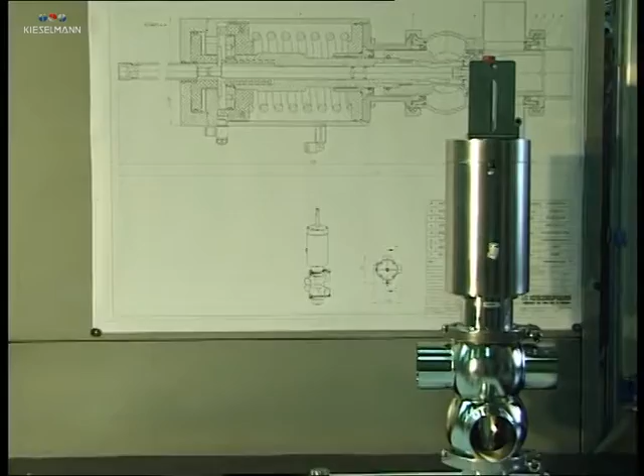The tools shown here are required for the disassembly and assembly of the valve. You will find the item numbers of the assembly tool kit in the operating instructions of the KIESELMANN double-seat valve.

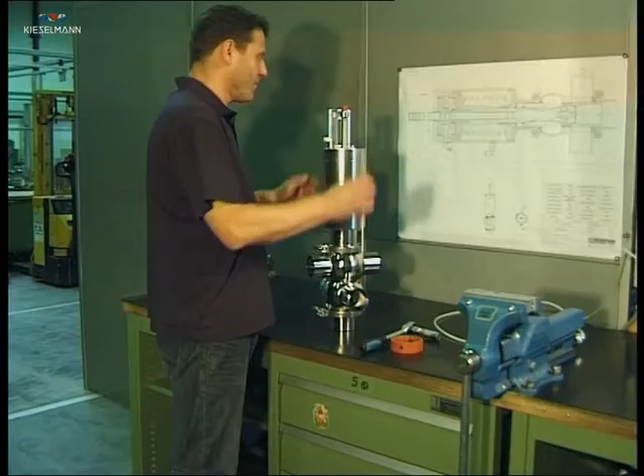Disassembly. Remove the control air, steam, and/or cleaning pipes and electrical cables, sensor brackets, or control heads from the plant before the valve is dismounted.

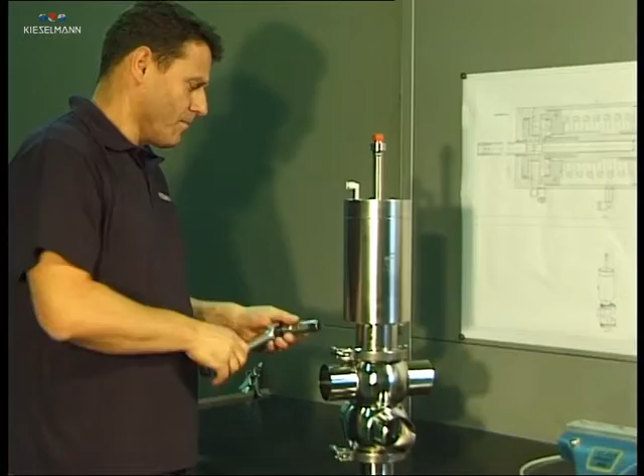Unscrew the upper locking clamp. When you apply air, the actuator will be automatically lifted out of the body. A distance is inserted between lantern and shaft seal. Our mechanic uses an appropriate seal. Let the air off again.

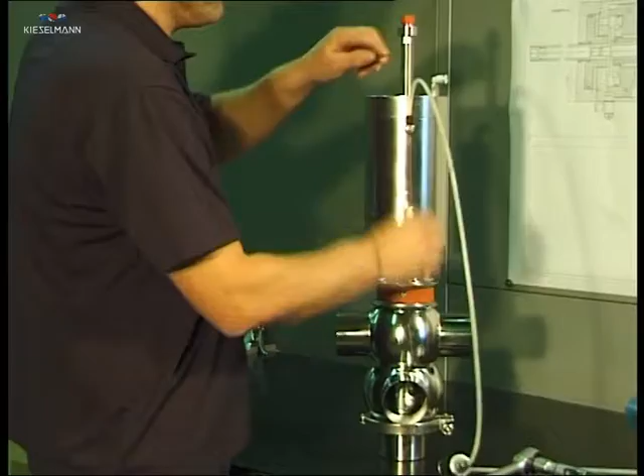The valve plate is lifted out of the valve seat. Pull the valve insert carefully upwards out of the body without tilting it. After having unscrewed the lower locking clamp, the lower shaft seal can be removed.

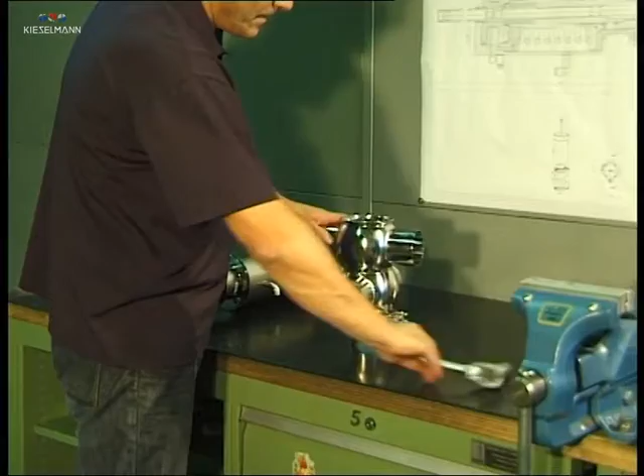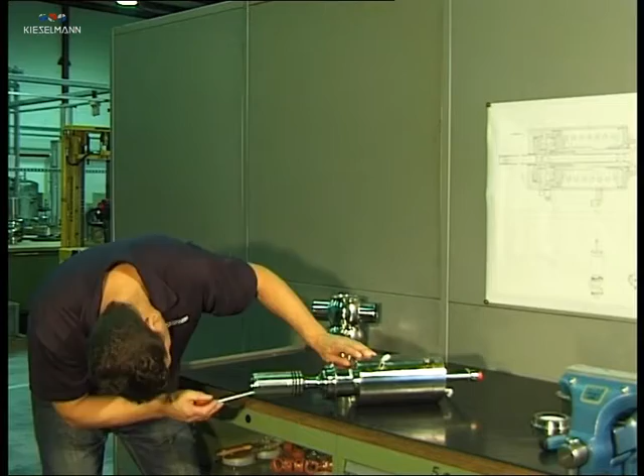To remove the lower piston, the nut in the piston is unscrewed. To do this, hold with an open-end wrench at the top of the actuator.

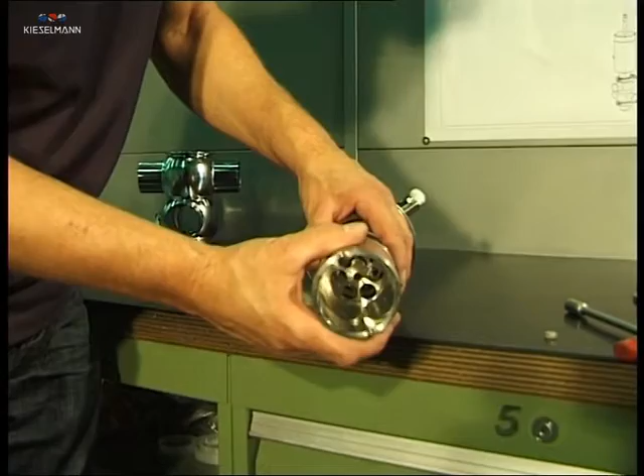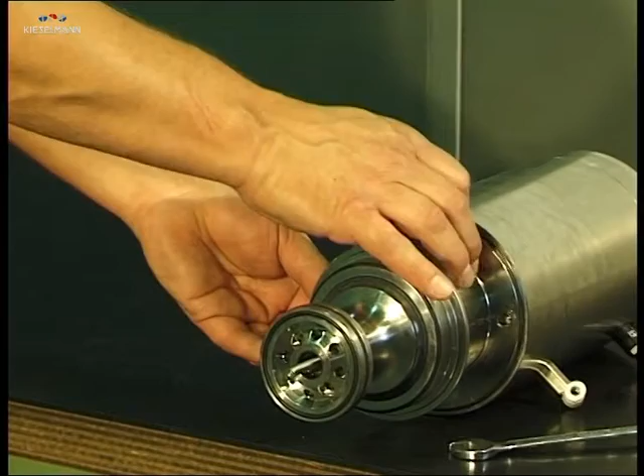Unscrew the fastening screws of the lantern. Pull the lantern from the piston until you see the bore in the spindle. Place a suitable hinged hook wrench in the bore.

Two disassembly situations may arise when the upper piston is removed. Situation 1, the piston comes off the spindle. Situation 2, the piston plate comes off the piston.

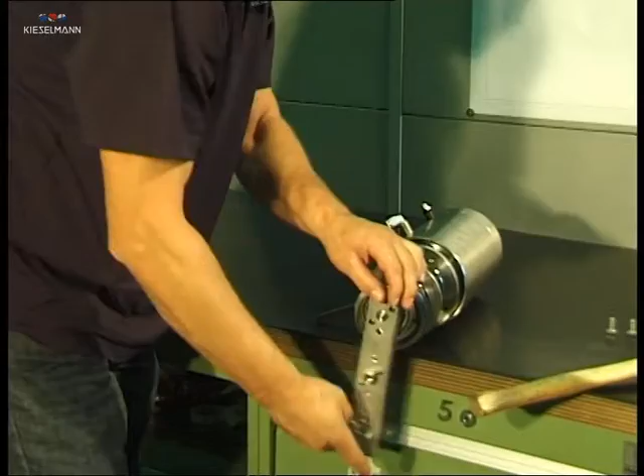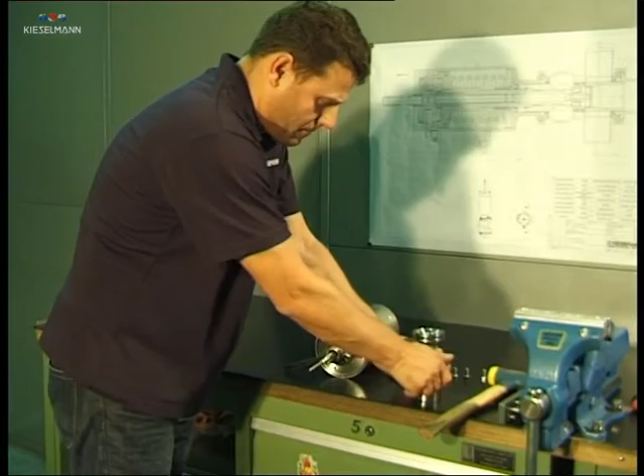Situation 1: Loosen the piston by means of the assembly plate and unscrew it. Remove the lantern and piston with the shaft seal. Push the shaft seal off against the piston plate.

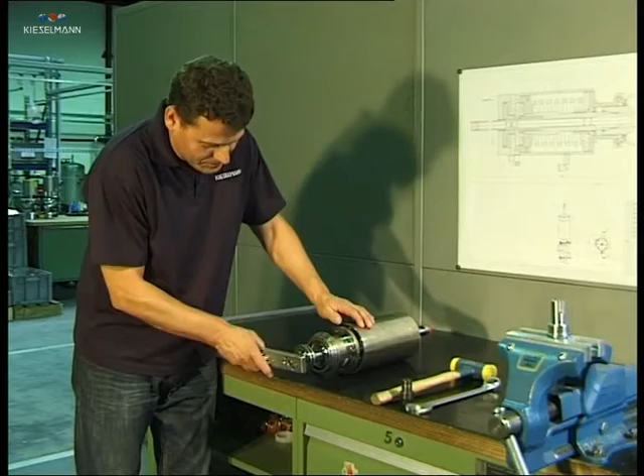Situation 2: The piston plate comes off the piston. As seen in situation 1, loosen the piston by means of the assembly plate. If only the piston plate loosens, unscrew it, remove the seal, and loosen the upper piston by means of the eccentric and unscrew it.

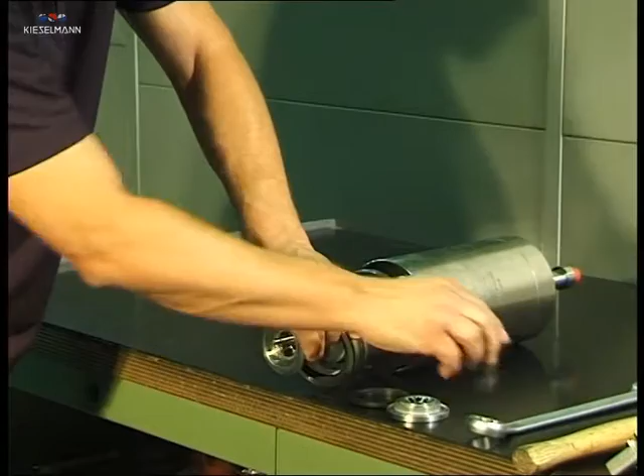Remove the circlip from the spindle. Push the lift stop from the spindle.

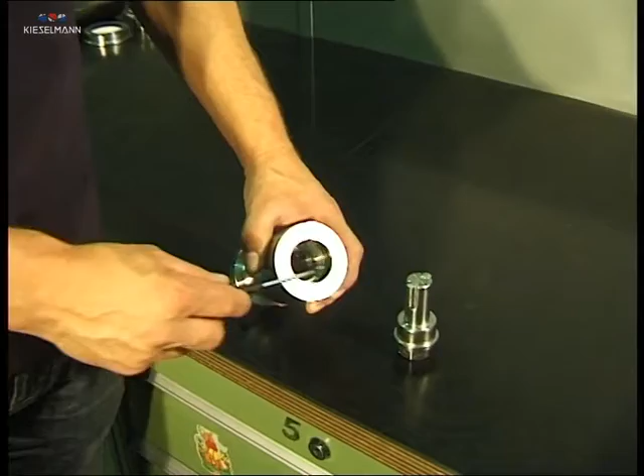If the piston loosens after situation 1, the piston plate must be dismounted. Remove the O-ring in the piston. Tighten the socket spanner of the assembly tool kit in the vise and put the piston on.

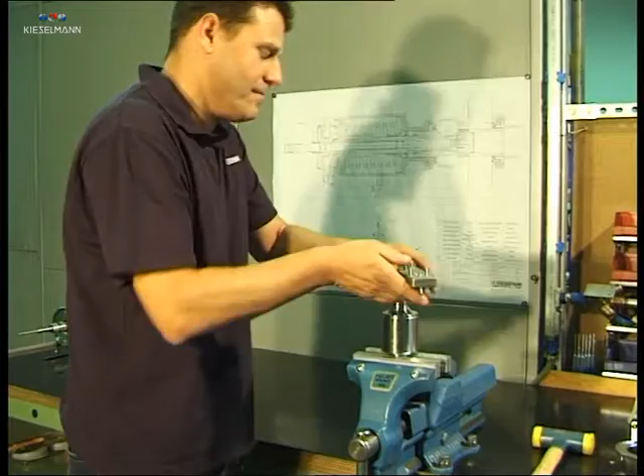Loosen the piston plate from the piston with the assembly plate and unscrew it. Remove the sealing ring. Remove the O-rings from the piston plate.

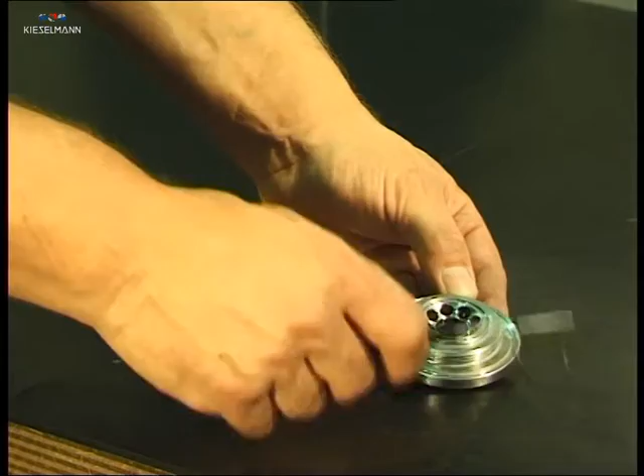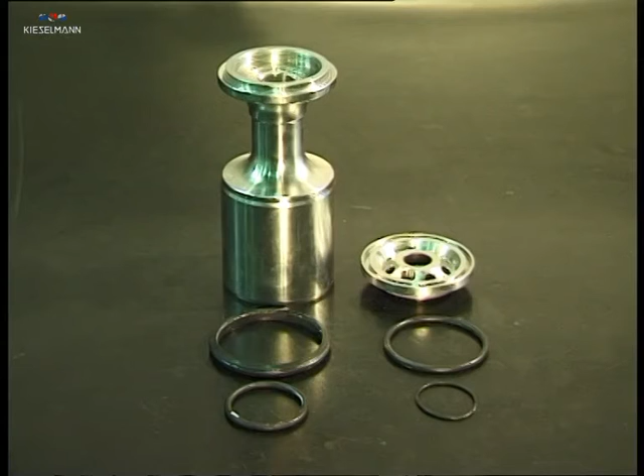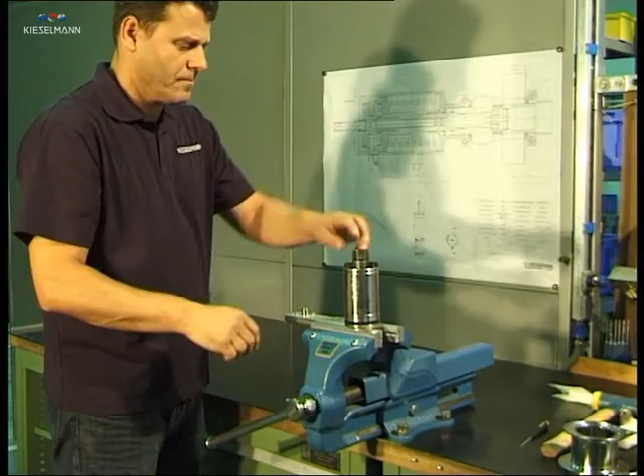To remove the lower piston plate from the lower piston, you have to tighten the assembly plate in the vise and put the piston on, as you can see here. Insert the suitable socket spanner in the slot of the lower piston and remove the piston from the piston plate with an open-end wrench. Remove the seals from the piston plate and from the piston.

Remove the sealing rings and O-rings of the lift stop and of the shaft seals. Disassembly of the double seat valve is completed.

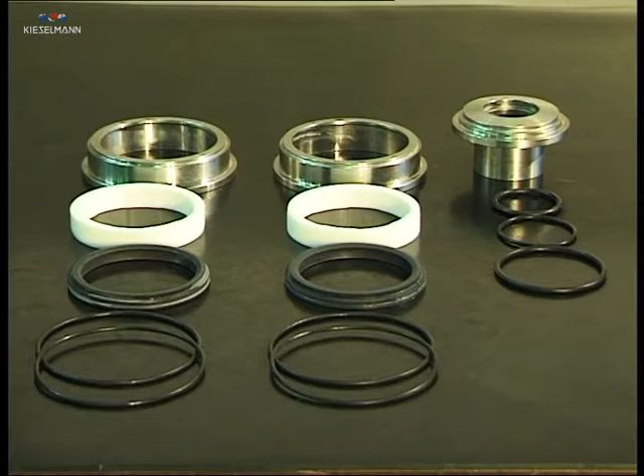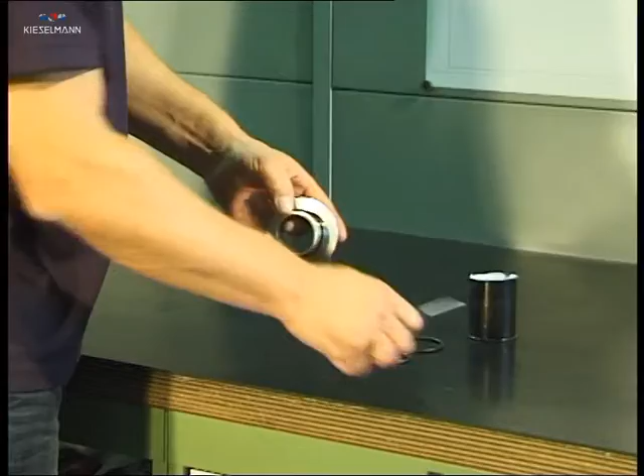Assembly. Clean and slightly lubricate the mounting spaces and running surfaces. Change all wear parts and lubricate them with a suitable grease before assembly.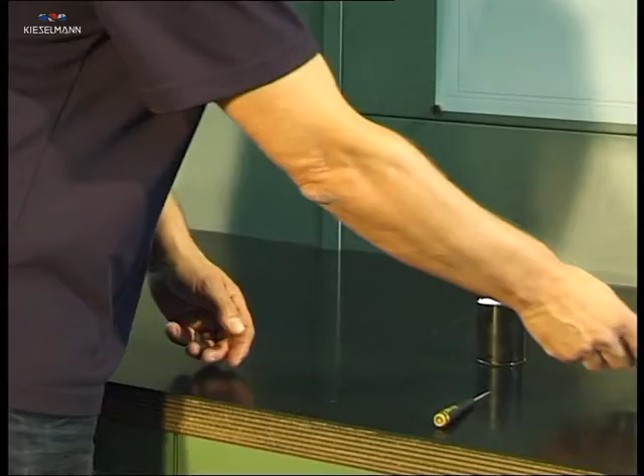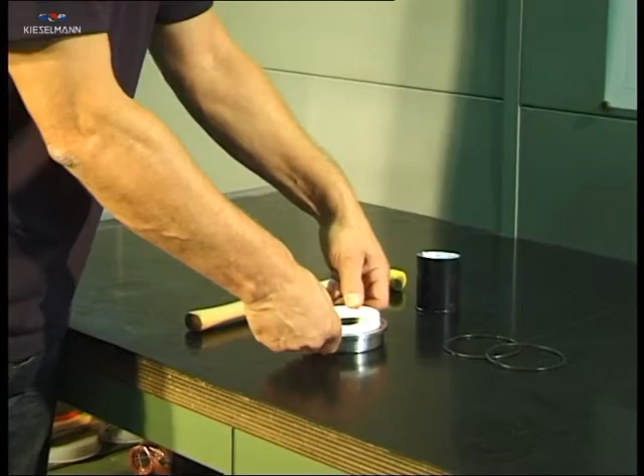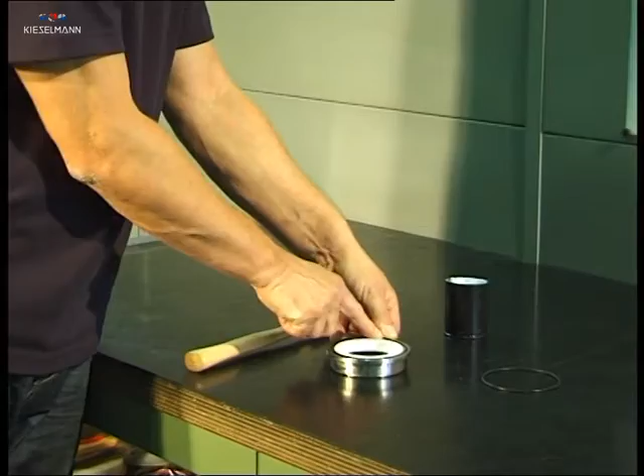Fit the O-rings into the lift stop. Put the shaft seal in the insert. Put the bearing bush with the chamfered side onto the insert, press it in and tap it gently. Insert the O-rings in the insert. Assemble the second shaft seal in the same manner.

Assembly of the lower piston assembly. Tighten the assembly plate in the vise. Fix the lower piston plate on the plate. To make sure that the sealing ring is perfectly pressed, you first screw the piston without the sealing ring into the piston plate until the metallics stop. Mark this position with a paint marker.

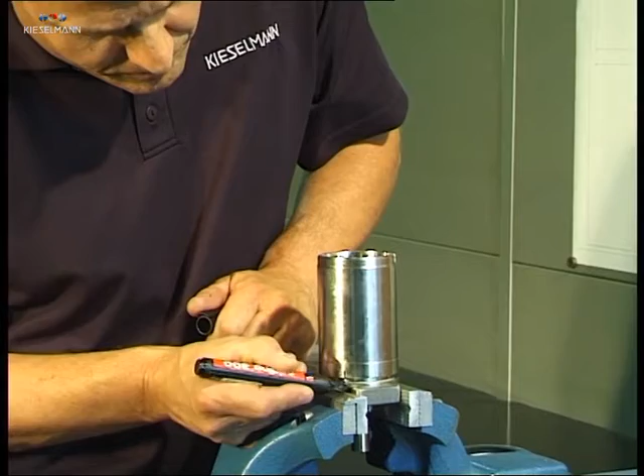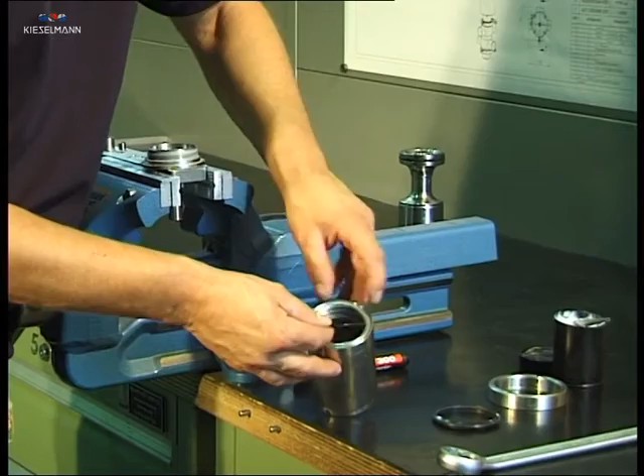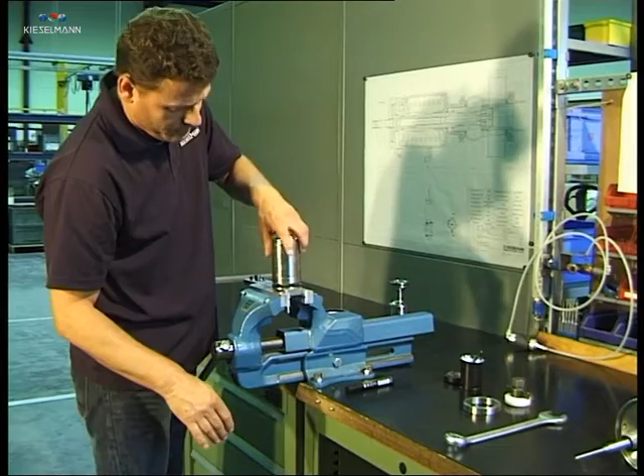Unscrew the piston, mount the O-ring in the piston, and put the sealing ring into the piston plate. Now screw the piston plate in by hand. Put the centering ring over the sealing ring to make sure that the sealing ring is concentrically pressed. Tighten the piston with a socket wrench and an open-end wrench until the color marking is reached.

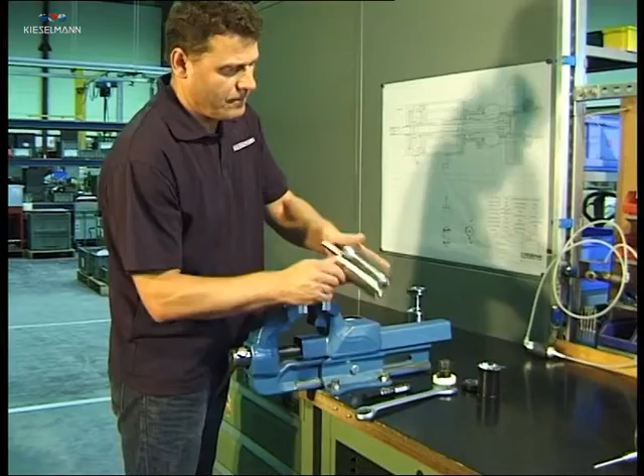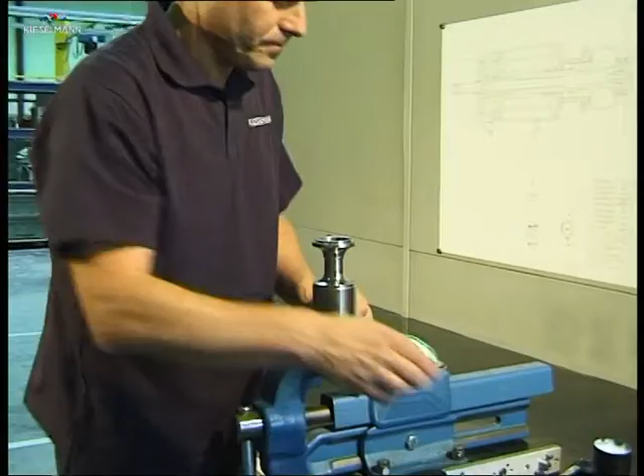Assembly of the upper piston assembly. Fix the socket wrench in the vise. Place the upper piston and screw the piston plate in until the metallics stop. Mark the position with a paint marker. Unscrew the plate.

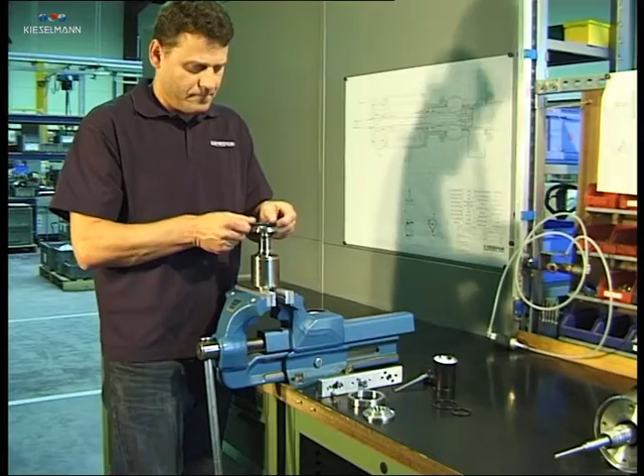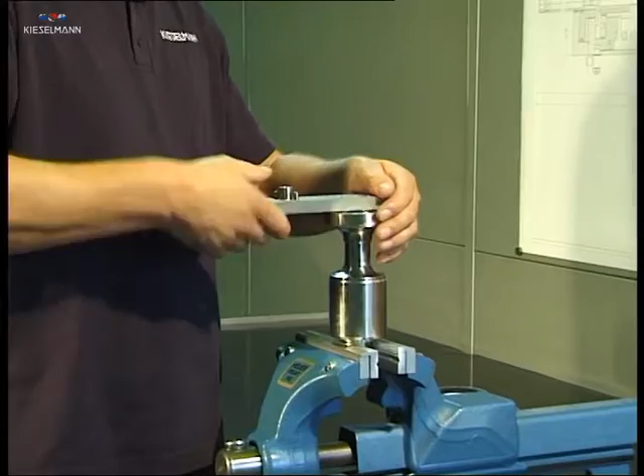Mount the O-ring and sealing ring and screw the plate in by hand. To guarantee an optimal eccentric pressing, the eccentric ring is put again over the sealing. Screw the piston plate in the piston until the color marking is reached.

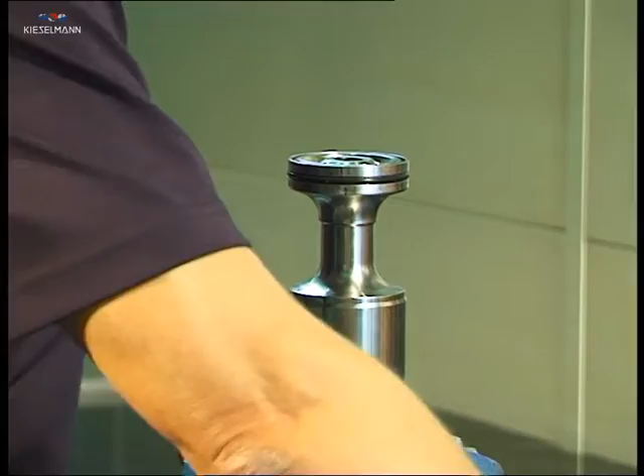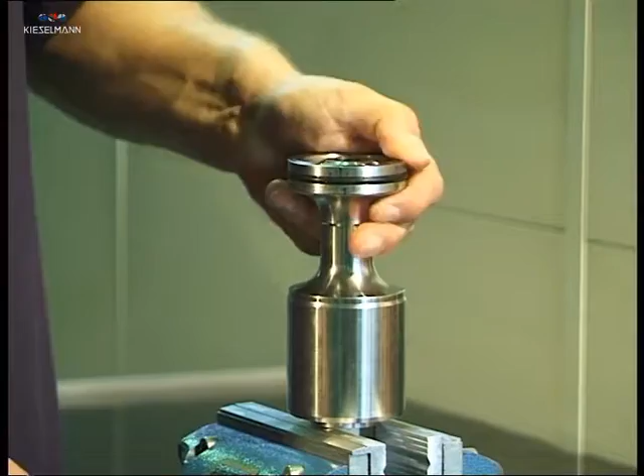Place the O-ring on the front side of the piston plate and push it in at the opposite sides respectively. Important: don't grease the O-ring and slot. After you have mounted the O-ring at the bottom of the piston, all seals were changed.

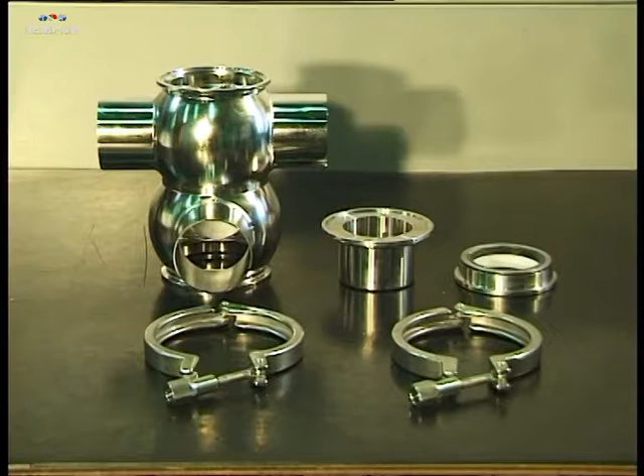Assembly of the lower shaft seal. Put the shaft seal on the bottom of the body. Place the body and mount the locking clamp.

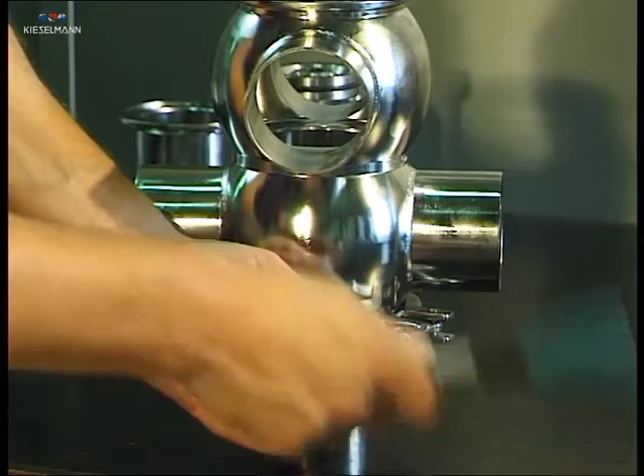Join assemblies. After having greased the threads and running surfaces, the lift stop is pushed onto the spindle and pressed to the actuator up to the stop. Mount the lantern, but do not tighten it.

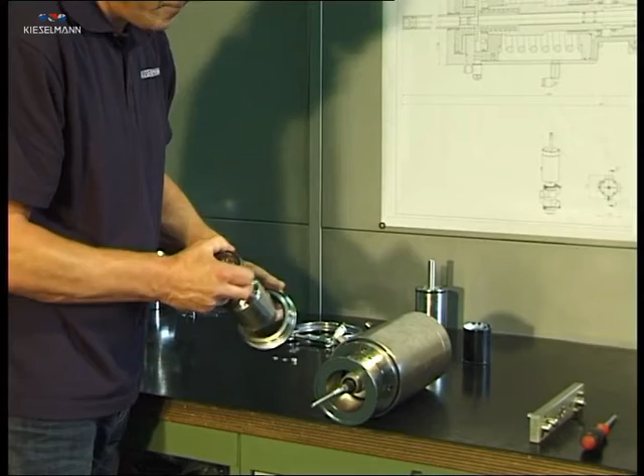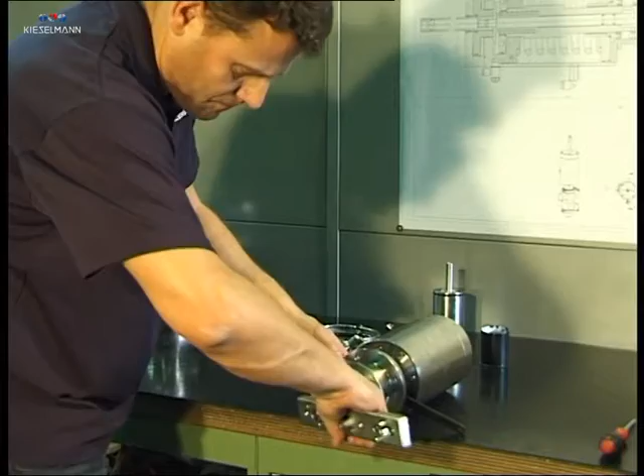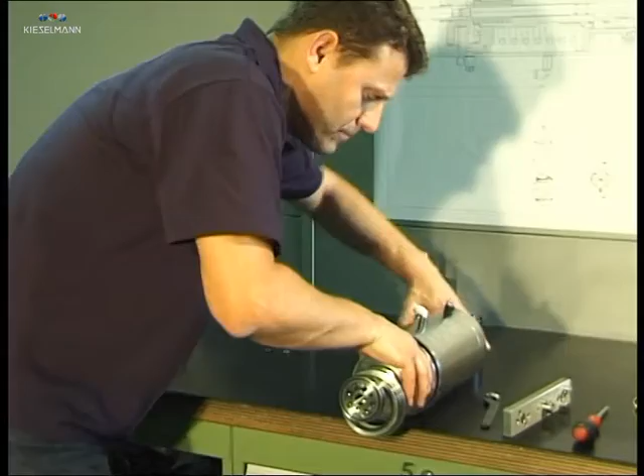Push the shaft seal onto the upper piston. Screw the upper piston onto the spindle at the actuator, and tighten with the assembly plate. Position the lantern on the actuator and screw it down.

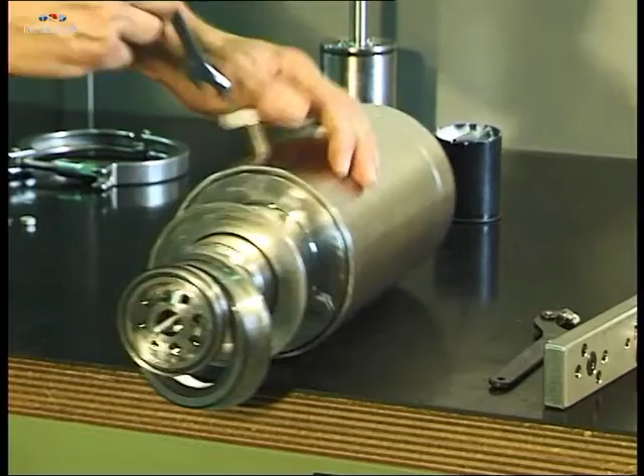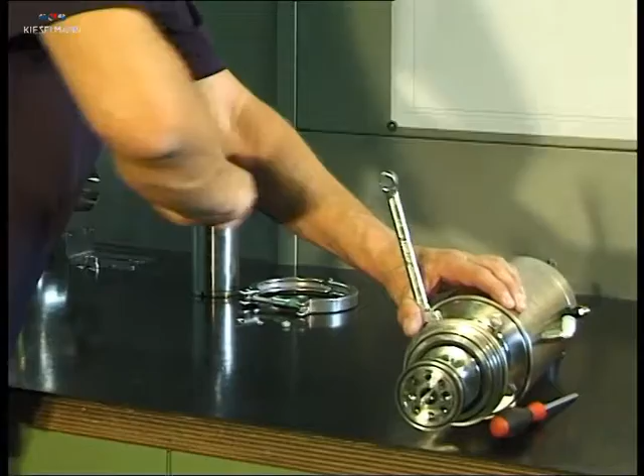Mount the circlip. Put the lower piston onto the spindle. Push the washer over the thread. Tighten the piston with the hexagon nut contained in the seal kit.

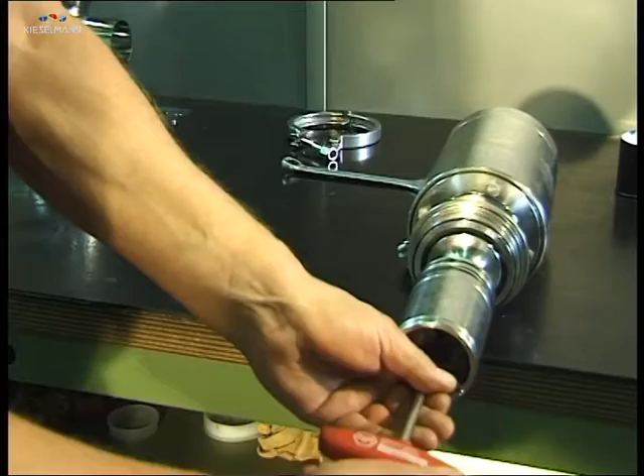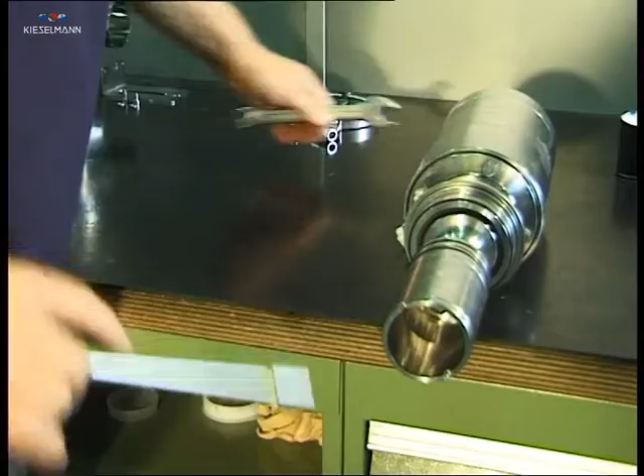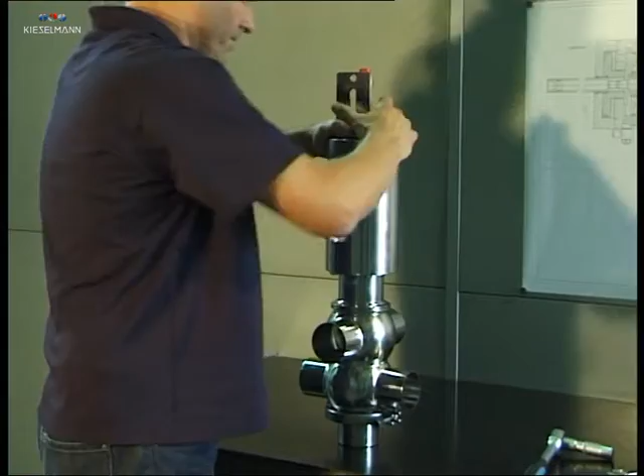Mount the sensor support, and mount carefully the valve insert in the body without tilting it. Mount the locking clamp and tighten it.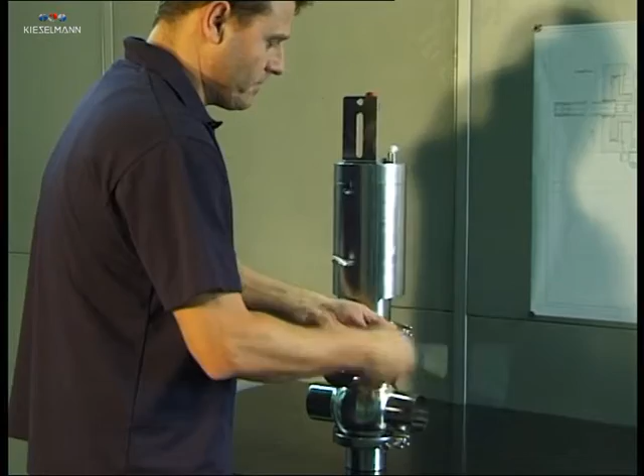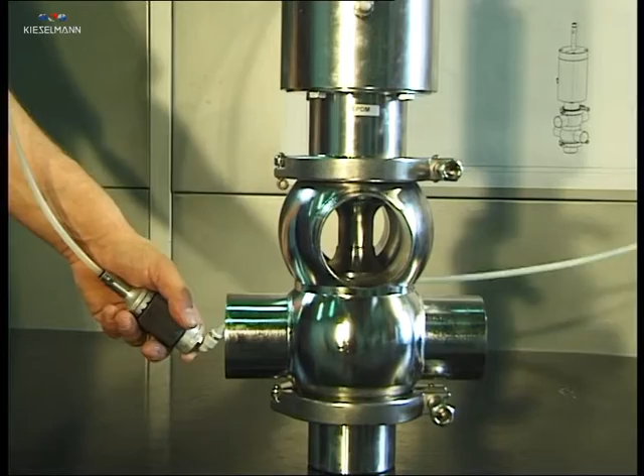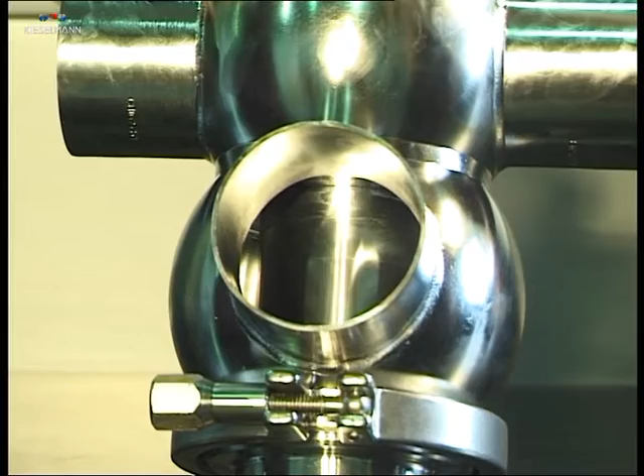To check the valve functions, connect the compressed air pipe at the actuator. Check first main stroke, then stroke below, and stroke top. The assembly was successfully carried out.

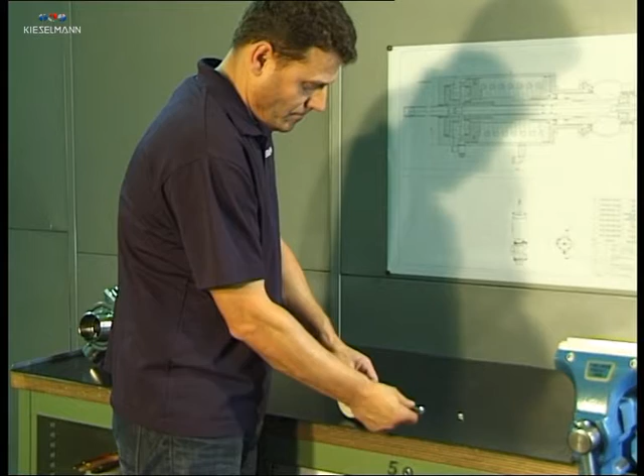Disassembly. Pull the 4 sleeves out of the insert with a puller.

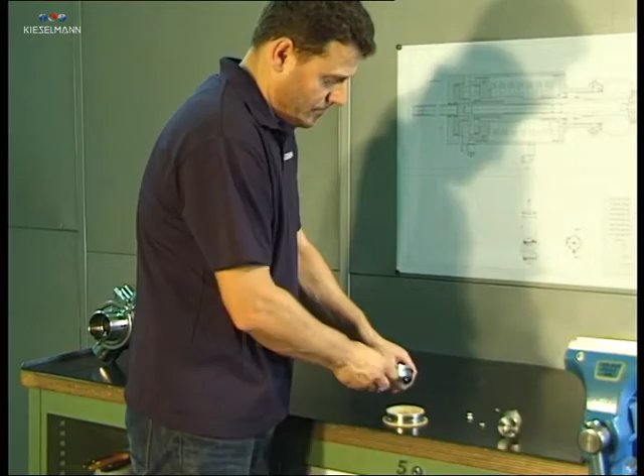Remove the insert. Remove the shells and the annular spring from the K-Flex seal.

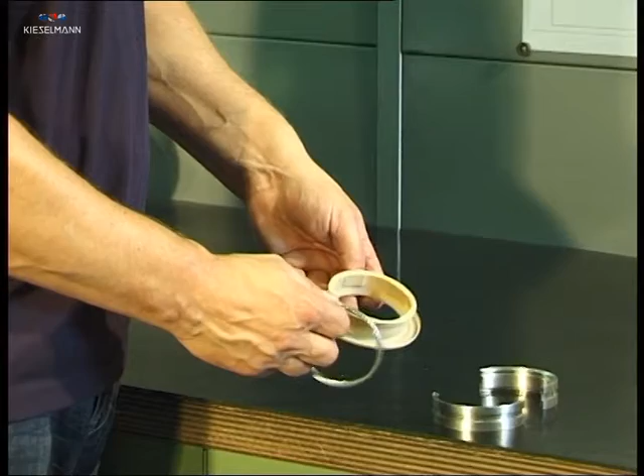Clean the mounting spaces and running surfaces. Change the wear parts. The seal kit of the K-Flex shaft seal contains the annular spring and the K-Flex seal.

Assembly. Put the annular spring into the seal. Lay both shells around the seal. Make sure that the shells fit exactly.

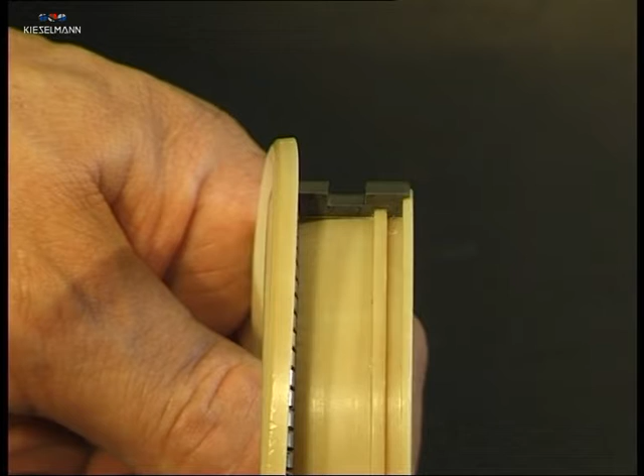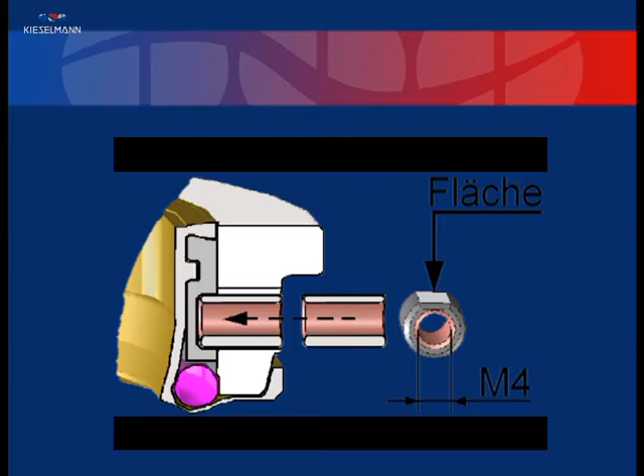Push the assembly into the insert. The sleeves are mounted in the slot of shells with the ground surfaces. The assembly was successfully carried out.

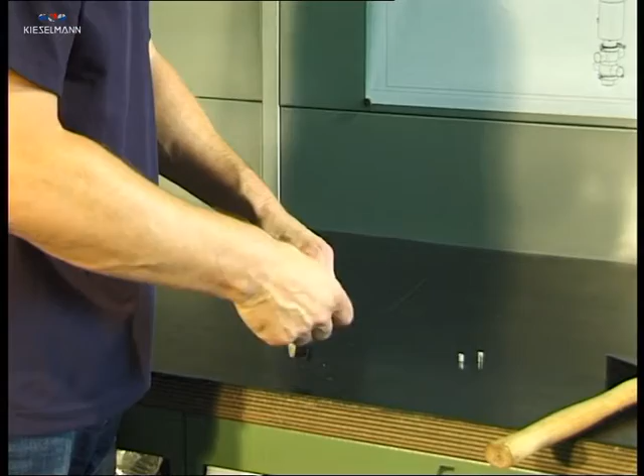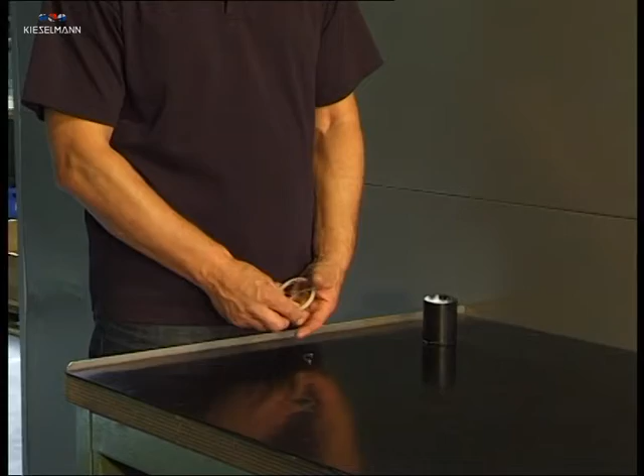Disassembly. The K-Flex sealing ring is supported by a 4-part ring shell and an O-ring. First remove the ring shell, then the O-ring.

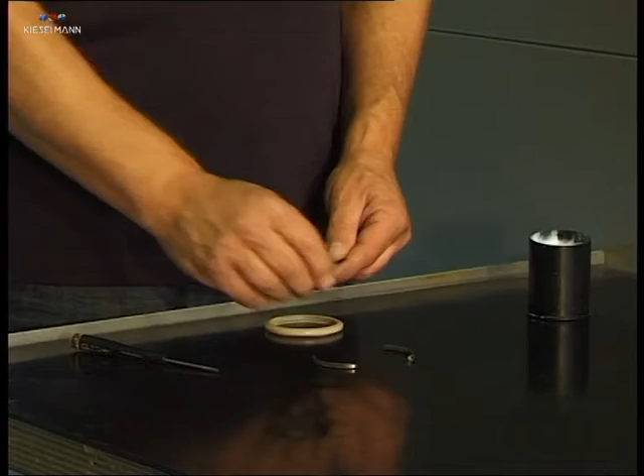Clean the mounting spaces and running surfaces after disassembly. Change the wear parts. The seal kit of the K-Flex sealing ring contains an O-ring and a K-Flex sealing ring. Don't throw the 4 supporting elements away - they are not contained in the spare parts kit and are reused.

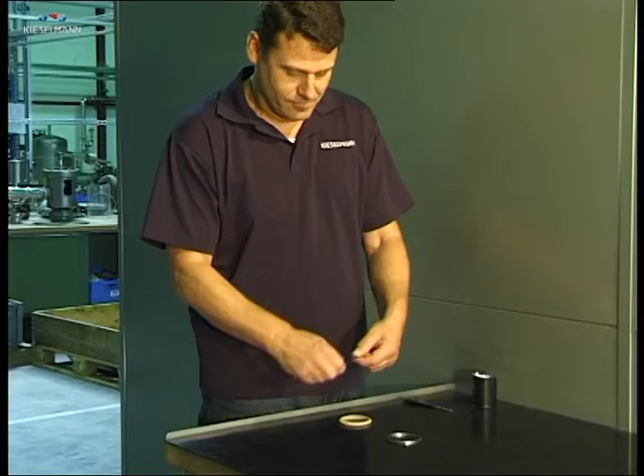Assembly. Put the O-ring into the sealing ring. Mount the ring shells in the order A, B, C, D.

The assembly was successfully carried out.